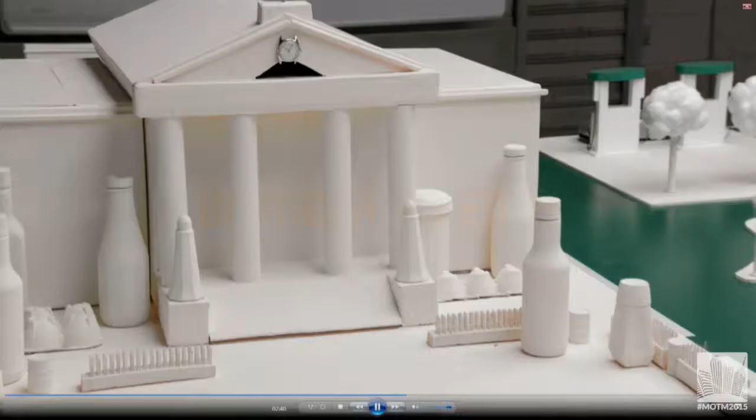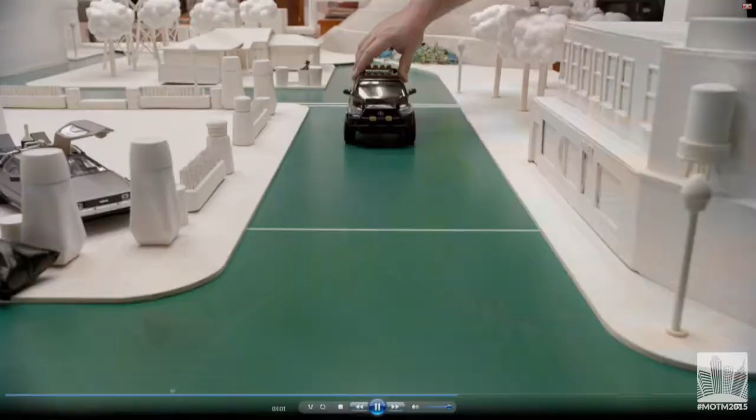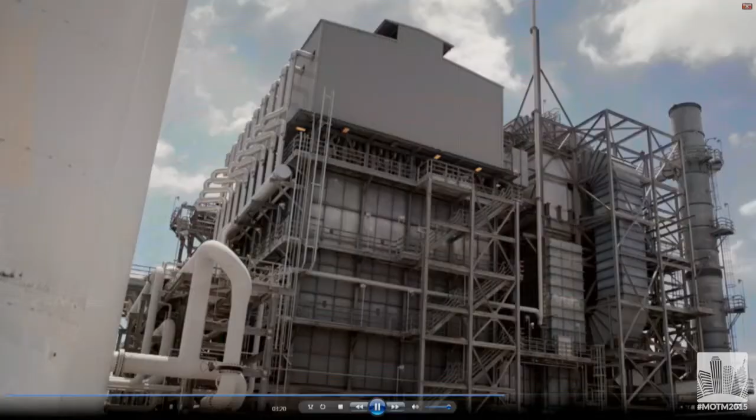Didn't have time to paint it or build it to scale, I see. That is the Toyota Mirai, it's a fuel cell car. It's powered by hydrogen, which in its monatomic form... Misha, English. Sorry, let's start at the beginning. So when I last left you guys, I went on a little trash collection journey, you might recognize some of these locations. The end of the journey was at the landfill, where all the trash gets placed, decomposes, and produces an enormous amount of biogas. A special facility then receives the purified gas, combined with natural gas from the grid, where it all gets processed into hydrogen. Hydrogen? Are you telling me this sucker's nuclear? No, this sucker's electrical. All that hydrogen is piped or transported into a fuel station, where we can then fuel our vehicle.

A vehicle which, if my calculations are correct, should be arriving right about now. Give me a minute. It works, right? You bet your ass it works. So you gonna take us for a spin or what? Hop on in. Shotgun. What do you say we get this baby up to 88? Just drive. Come on, Chris, give us a great Scott. Great Scott.

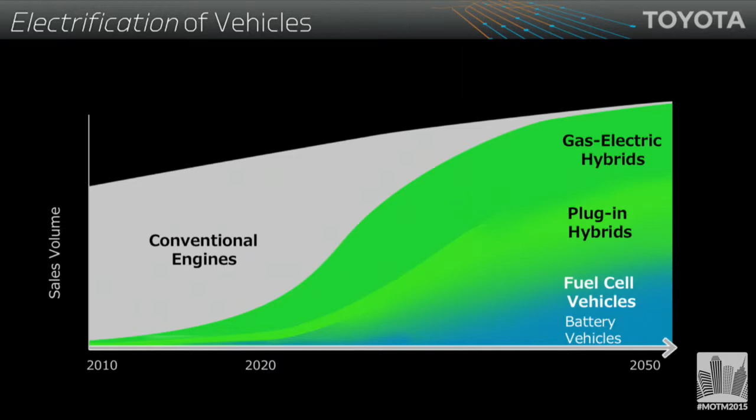So if we look at fuel cell vehicles, the big question is where do we get the hydrogen from? Because really, this is no longer a story about the car, it's a story about energy. Where do we get the energy to make this fuel that we're going to be able to move around in, no matter what type of vehicle it is, but do it in a way that's sustainable for the planet?

So biogas, wind, and solar all meet the definitions of renewable energy. One of the other key things is that when we talk about wind and solar, we think of that as stored energy. A lot of projects are going on in Europe, starting in Japan, and in other areas in Canada, where the focus is trying to take curtailed renewables. Basically, you have wind, you have solar, for example, sources of energy that have to get turned off at nighttime, or turned off past the demand that doesn't match the supply, because the load, the grid, cannot take that energy.

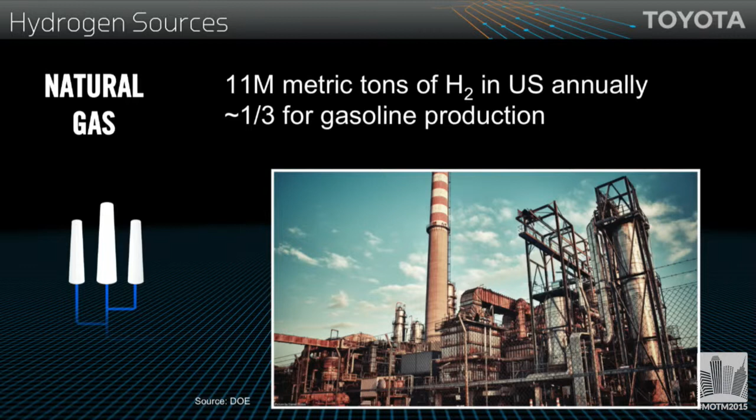Natural gas is one of the largest ways that we make hydrogen. In the US today, there's over 11 million metric tons of hydrogen made, and the majority of it is made by natural gas. A third of that hydrogen made from natural gas is used for gasoline production. Every oil refinery we have in the US, every oil refinery globally, uses hydrogen in the process to make gasoline. So when we think of using natural gas to make hydrogen for fuel cell vehicles, you can think of it as taking away the hydrogen that was used to make gasoline, and instead using it in a cleaner process, not having combustion, in a fuel cell vehicle.

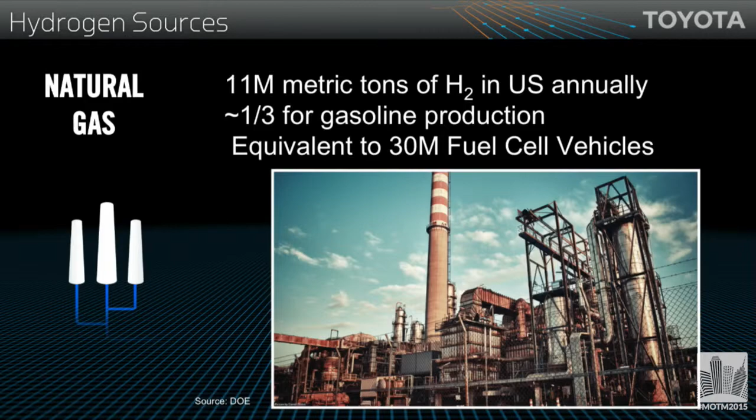If you were to take all the hydrogen that is used in making gasoline, it would be equivalent to 30 million vehicles annually that you could power in this country. Just to give you some perspective of how much natural gas we use today just for cars.

It's also kind of close to home for us at Toyota. In Torrance, in Southern California, we have a hydrogen fueling station. It is the only station in North America that is powered from a pipeline of hydrogen. We happen to be in the South Bay region of Los Angeles, and in that area it's filled with refineries. There's an ExxonMobil refinery down the street, there's a Tesoro refinery down the other street. There are central plants in the area that are steam methane reformers that take natural gas from the grid and make hydrogen, putting it into a pipeline network that runs throughout the South Bay of Los Angeles.

That network then goes to oil refineries and is used in the production of gasoline. We happen to have an oil refinery down the street from our Toyota campus, and that pipeline runs right down the road. So we've tapped into that pipeline of hydrogen, and we're using it today to fuel a hydrogen fueling station. It's the largest demand fueling station in North America. We have four dispensers, used by all the major auto companies that have fuel cell programs, and it's always over capacity, so they actually can't make enough hydrogen at this one site, and we're looking forward to the upgrade that's going to happen next year.

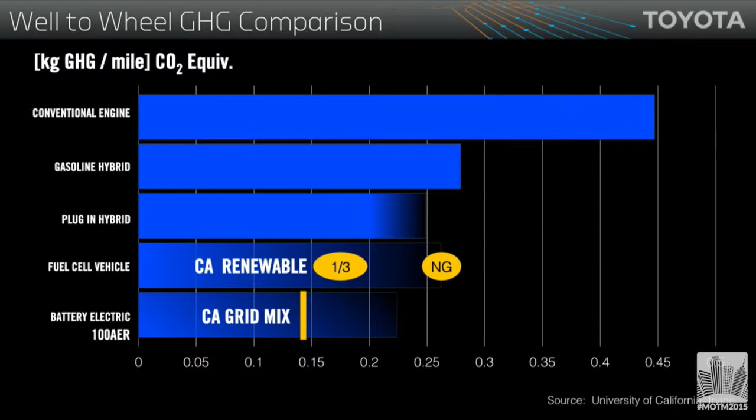All four of these technologies are low carbon pathways, and they're all part of that mix towards the ultimate goal of a 90% reduction in carbon by 2050. Of course, we all know battery electric vehicles can be charged by complete renewables, 100%, but I want to make sure you're clear that we can do the same thing for fuel cell vehicles—it just depends on how you make that energy. Both can be 100% renewable if that system is put into place.

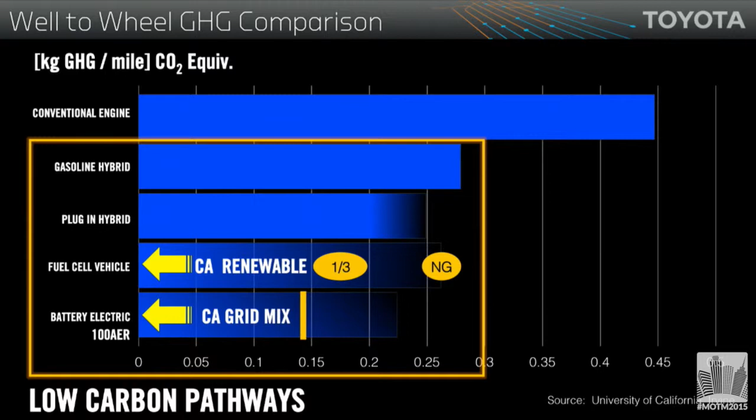So let me switch gears a little bit. Let me tell you why we believe in fuel cells. Well, we also believe in battery electric vehicles—they both have a place in the portfolio for future mobility.

However, with a fuel cell vehicle, you're not putting more power in the vehicle when you go to a larger driving range—you're just putting in more hydrogen. You can store more energy in hydrogen than you can with batteries, and that's the fundamental aspect. Batteries are not at the point where they can drop in with the same amount of energy storage as a hydrogen car.

So where we really see a place for batteries right now, in battery electric vehicles, is for shorter range, urban environments that are suitable for the customer at that price point. But the key thing is that technology development still needs to occur. Where we see the next technologies in batteries is that it's going to allow us to bring the cost down and make it more widespread within that market range, becoming a more profitable vehicle option.

Toyota is the largest producer of automotive batteries on the planet. We have a partnership with Panasonic, and other partnerships with other companies. We do a tremendous amount of research in the lab. We have something called the Sakichi battery target.

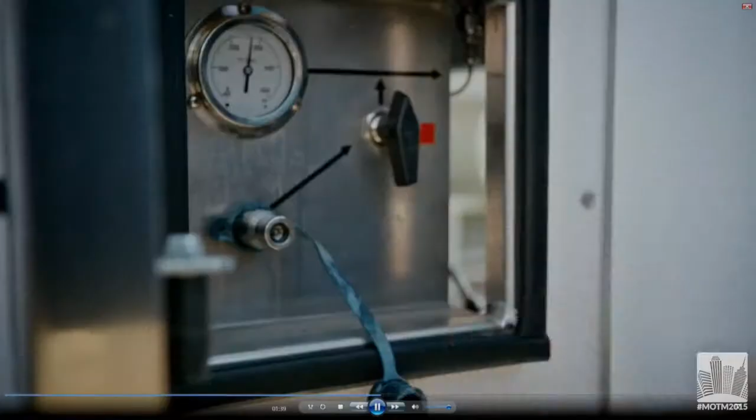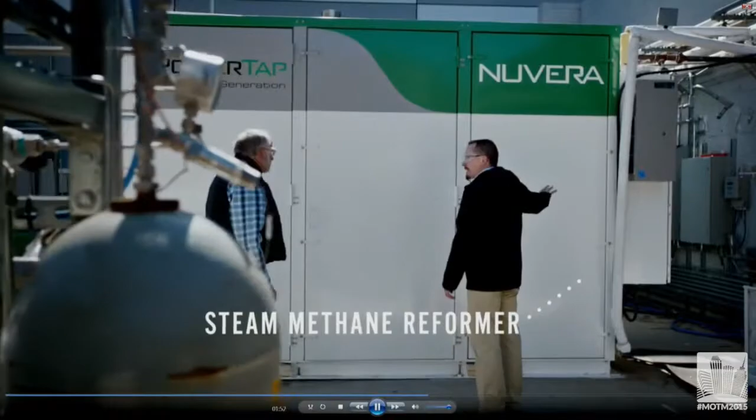So now that we have our truckload of manure, we're on our way to the digester, which is basically a big poo lagoon that breaks down our manure and releases some lovely smelling raw biogas. Then we're collecting some purified gas off the other end and taking it to a steam methane reformer. This is where the real magic happens. Using steam and heat, we can strip out the hydrogen, which should then be able to power our vehicle. A moment of truth.

Want to drive? I would. All right. Well, it started.

Well, I told you it could be done, and here we are. This is great. Did you ever think we'd be sitting here, driving a car on that? It seemed like a stretch. No combustion engine in this car. The hydrogen and the oxygen from the air come together in that fuel cell, and it makes DC electricity. That's incredible, and it doesn't even smell.

But there's many other ways to get the hydrogen. We just demonstrated one with this process. We're driving down the road, running on bullshit.